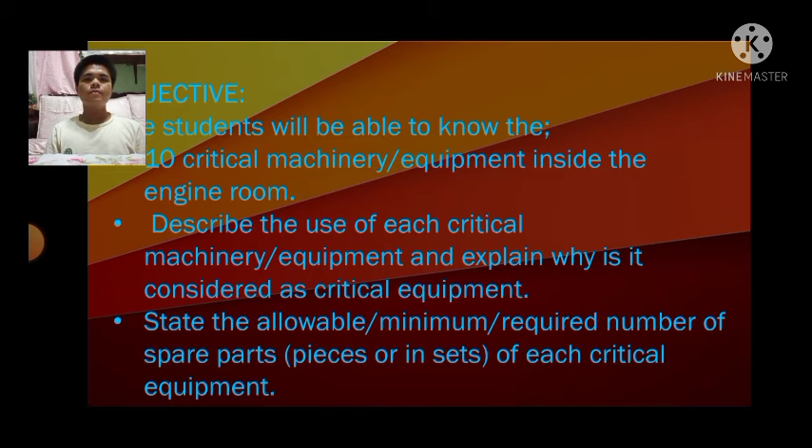So let's start. First we have the objective. The students will be able to know the 10 critical machinery equipment inside the engine room. Second, describe the use of each critical machinery or equipment and explain why it is considered critical equipment. And lastly, the students will state the allowable minimum required number of spare parts, pieces or sets of each critical equipment.

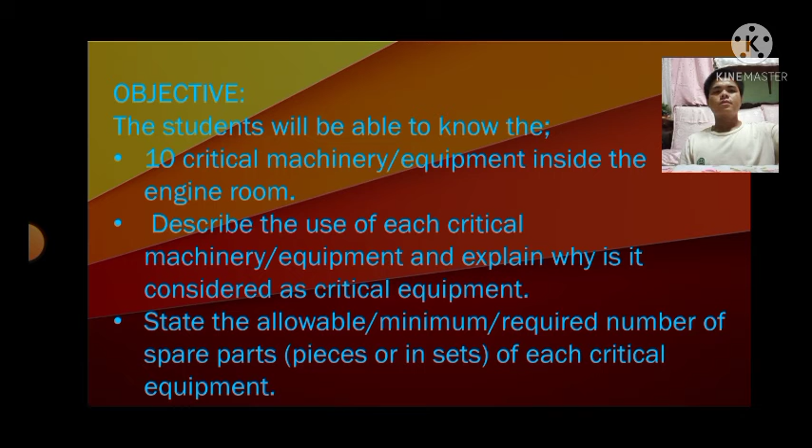So the first machinery is the electrical generating plant. Marine electrical power is vital to a ship's operation. Without marine electricity, ships will not be able to run any of the machinery and cannot perform their core purpose of sailing from one place to another.

Shipboard power is generated using a prime mover and an alternator working together. For this, an alternating current generator is used on board. The generator works on the principle that when a magnetic field around a conductor varies, a current is induced in the conductor.

So the electrical generating plant is one of the critical machinery on board because it is the source of power and energy to supply some machinery on board, allowing different types of pumps and other compressors to work, which use energy, power, and electricity.

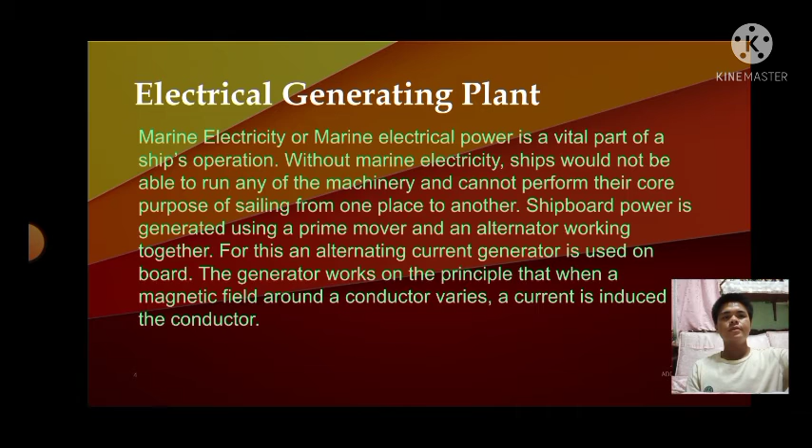Next is the main air compressor sets. The main marine air compressor acts as the power source for starting primary and auxiliary engines. It stores pressurized air so it can be released when the engine starts. It is used to supply highly pressurized air to start main and secondary engines. The air compressor has an air storage bottle which stores the pressurized air.

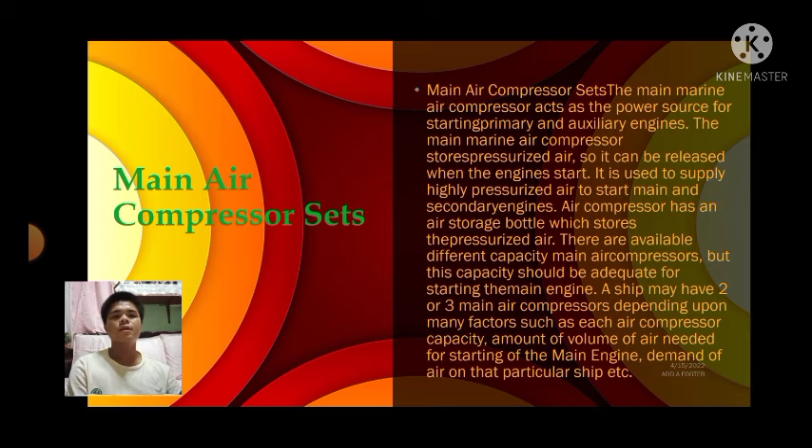There are different capacities of main air compressors available, but the capacity should be adequate for starting the main engine. A ship may have 2 or 3 main air compressors depending on many factors such as each air compressor

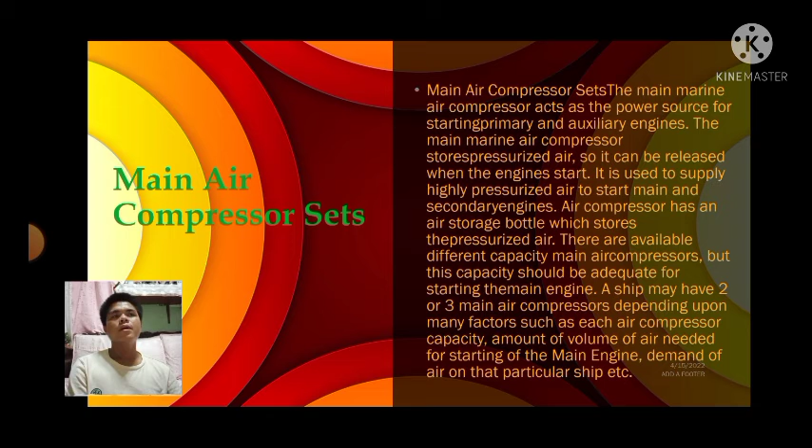capacity, amount of volume of air needed for starting the main engine, demand of air for that particular ship, etc. So the main air compressor sets are critical machinery on board ship because they are the source of air and one of the important things needed to start the main engine on board ships. So that's all, thank you.

HFO and LO pumps. One of the most critical pumps to have on board every ship is the oil transfer pump. Oil transfer is essential for a vessel to reach its destination, but it is also very hazardous. That is why you cannot take any chance with your marine oil transfer pump. As the name suggests, oil transfer pumps carry oil and other viscous liquids. In the marine industry, oil transfer pumps are responsible for transferring fuel oil around your ship.

Oil transfer pumps are also responsible for moving excess oil in the overflow tank back into the storage tank. They can be used for draining oil bilges and moving diesel oil from tank to tank. That's why having a reliable oil transfer pump is critical for the marine industry. If something goes wrong, you will be in a very hazardous situation, and if your pump is inadequate, you won't be able to fuel your ship correctly.

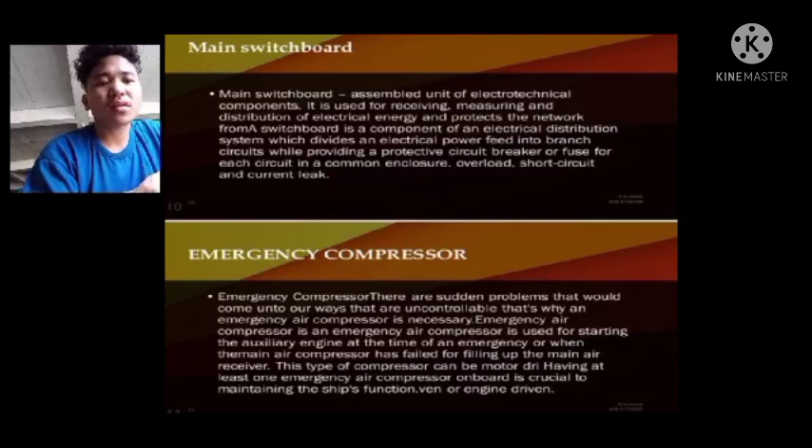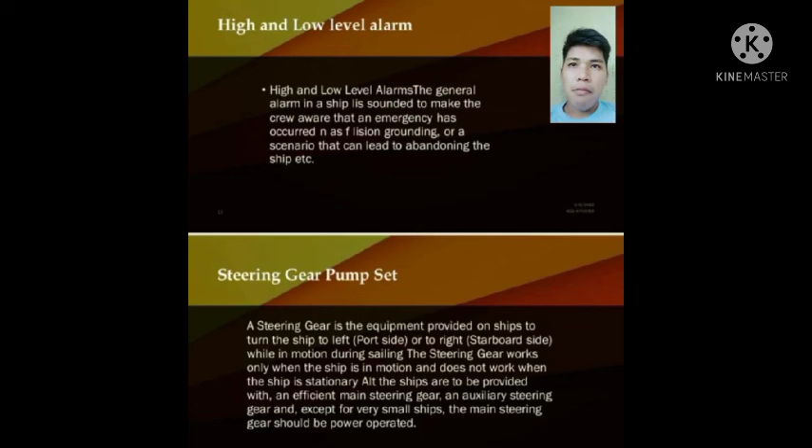High and low level alarm: the general alarm on the ship is sounded to make the crew aware that an emergency has occurred, such as fire, grounding, or a scenario that can lead to abandoning the ship, etc.

Steering gear pump set: a steering gear is the equipment provided on a ship to turn the ship to the left, port side, or to the right, starboard side, while in motion during sailing. The steering gear works only when the ship is in motion and does not work when the ship is stationary.

The ship is to be provided with an efficient main steering gear and an auxiliary steering gear, and except for a very small ship, the main steering gear should be power operated.

Ordering critical repairs or spares: when any item on these lists requires a spare or repair, the requisition must be endorsed as spare for critical equipment, marked appropriately, and followed up with a telephone call, as explained in the purchasing section of these procedures.

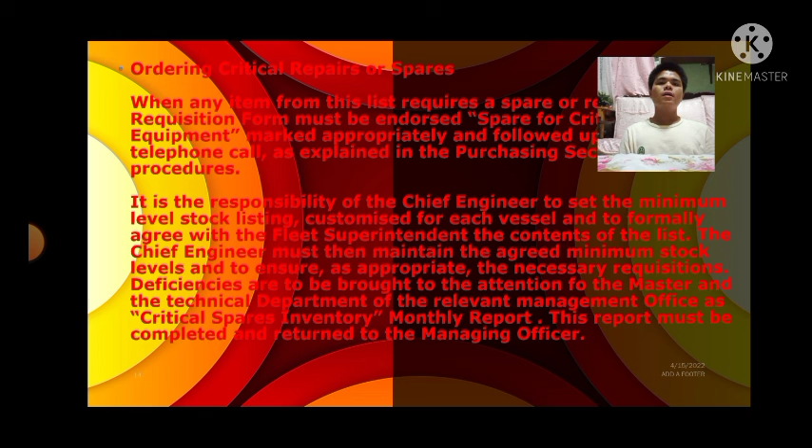Deficiencies are to be brought to the attention of the master and the technical department of the relevant management office as part of the critical spares inventory monthly report. This report must be completed and returned to the managing officer. That is how we order the spare parts for any machinery we are going to repair.